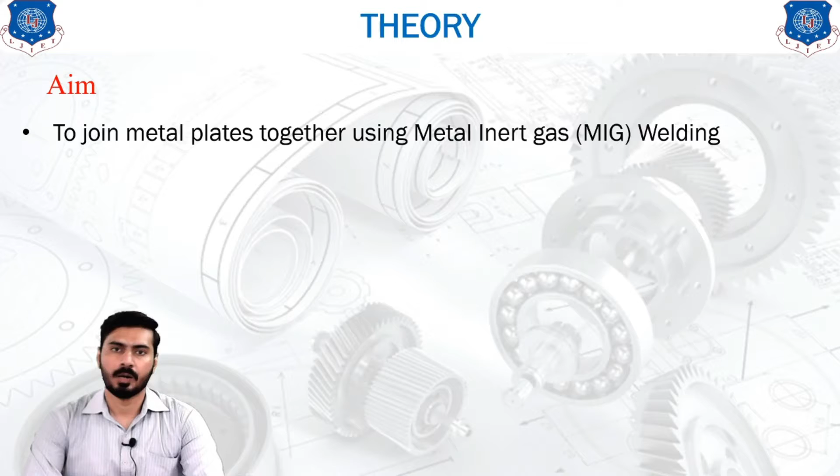Both are the same. You can perform each and every joint, but one more thing you need to understand before starting this type of practical is that MIG welding will help you create a longer joint lengthwise compared to any other type of welding. If you are welding using an arc welding setup or a gas welding setup, the length of the weld will be limited by the electrode or the filler material.

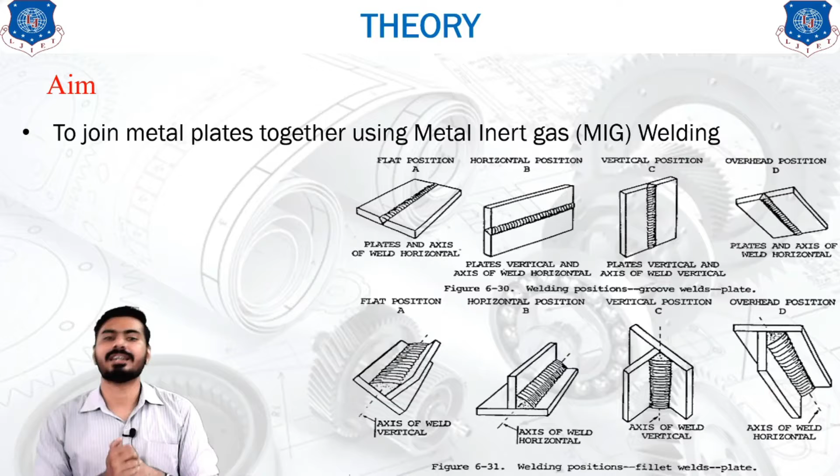But here in MIG welding, we are supplied with a continuous amount of electrode reeled up in a reel, or we can say a coil. That is why if you want to create a weld joint of a very large length, this type of welding will be useful for you.

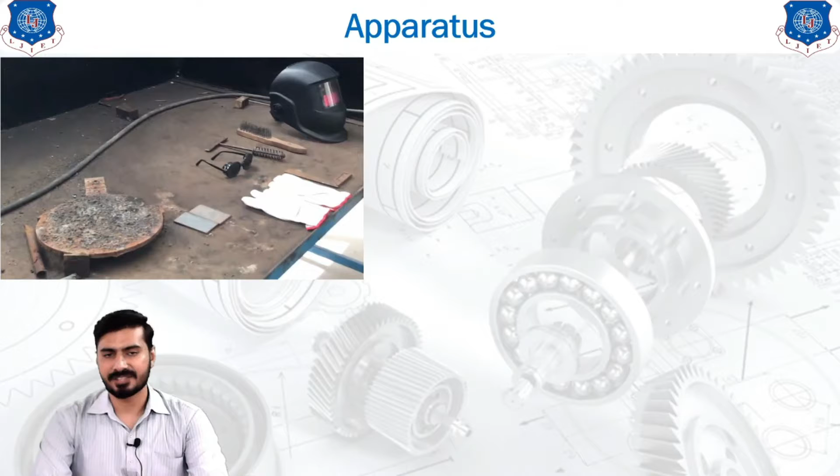How these practicals are performed will be explained through the apparatus used for this practical. As you can see, these are the basic apparatus, similar to the case of arc welding and gas welding, and if you have not seen that video, you can also watch it. Helmet, surface cleaner, negative earthing tool, gloves and eyeglasses are the same for each type of welding.

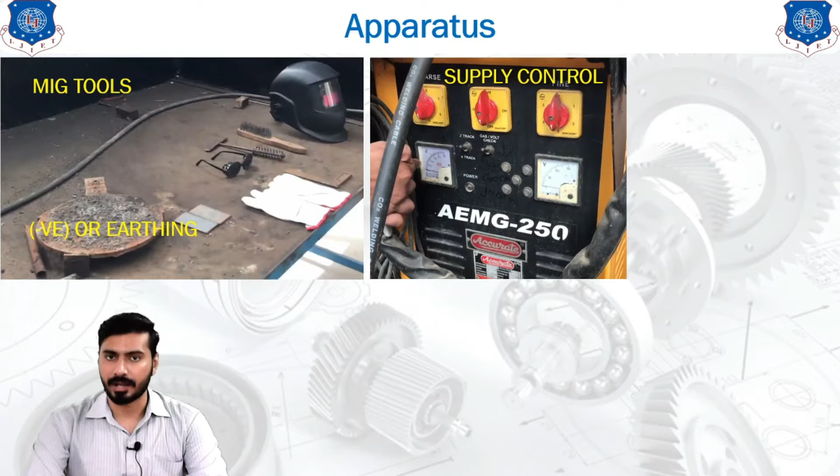Now we are looking at the control system or supply control of the MIG welding. This is the separate MIG system, where you can find different settings or dial gauges of the ammeter or current meter and the voltmeter, as well as different knobs to control the welding operation.

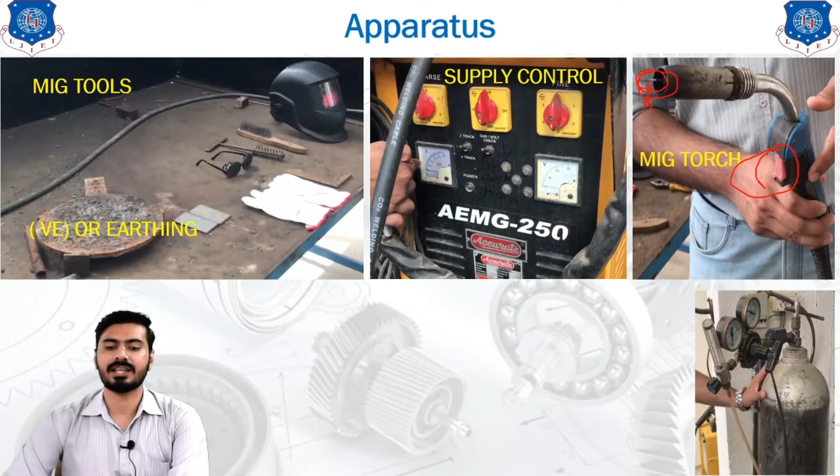So basically this is a torch containing the electrode in the middle, and in the surrounding it will be supplied with the inert gas, which is basically CO2 gas, supplied in this torch to perform the welding. Another thing you need to understand is this inert gas cylinder. This is basically MIG gas.

MIG gas can be any inert gas, but in our setup we are using CO2 as the inert gas. You will see these gauges, which help you find the pressure of the gas inside the cylinder as well as in the hose pipe, and there is also a heater provided here, which will be explained in the next part of the video.

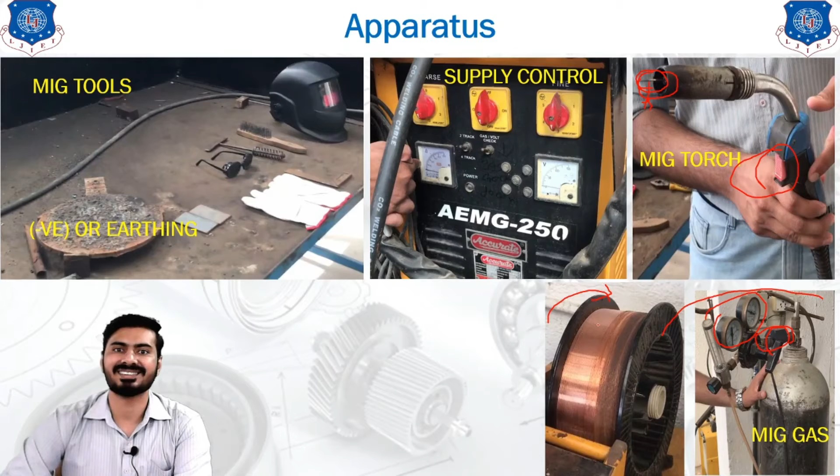Next is this electrode coil, where you can see the metal electrode reeled up in this component, which will be rotated to ensure the electrode is supplied continuously. As I said earlier, if you want to create a longer weld, this type of welding will supply a continuous amount of electrode, so the filler material will not run out, and that is why this type of welding is used for longer welds.

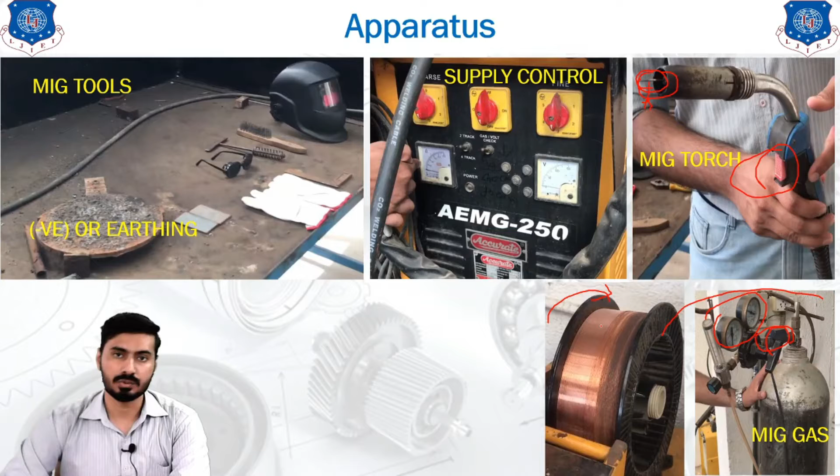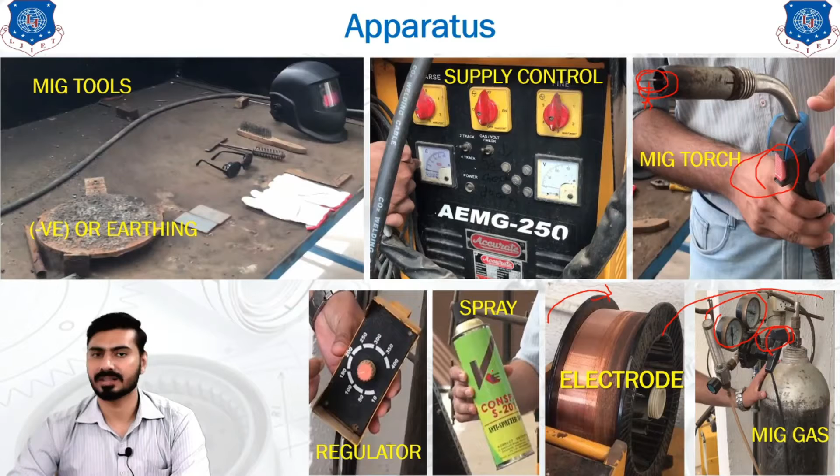This is the dial or the knob regulator, which you can see in this particular figure, which is used to regulate the speed of the electrode coming out. So basically these were the apparatus used for MIG welding, and now we are going to understand the working of MIG welding through this schematic diagram, which is the theoretical portion you need to understand before starting the practical.

So basically you can see over here that this is our weld, or this is our workpiece which is required to be welded with another one, and this is our electrode. This vertical portion, as you can see, is our electrode, and electricity is supplied through this electrode, which is a consumable electrode, and it will be melted in order to create the weld.

Now in order to ensure the continuous supply of the electrode, we have connected it with the wire feed rolls. Wire feed rolls will be continuously rotated after you press the button, and this rotation will ensure that there is a continuous supply of the electrode through this roller.

Next is this particular welding head. This particular welding head or torch of the MIG welding contains the gases, and these gases are supplied through this nozzle in order to create the shield around the weld, which prevents the oxidation of the weld, and eventually it will help you to increase or maintain the strength of the weld.

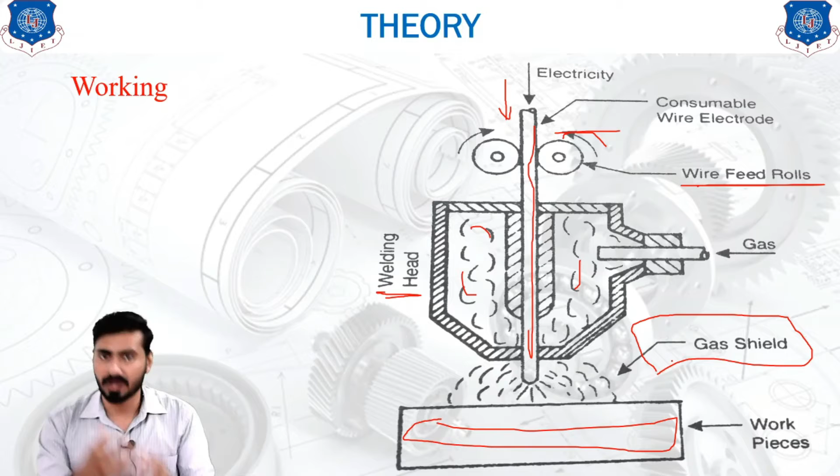So this is how the gas shield is provided, and basically this is also a type of shielded metal arc welding, but the only difference is that we are providing the electrode continuously through a wire feed mechanism, and that is why we will be able to create a longer weld as compared to any other types of welding. So we will be seeing the practical performance of this MIG welding in our setup in the next part.

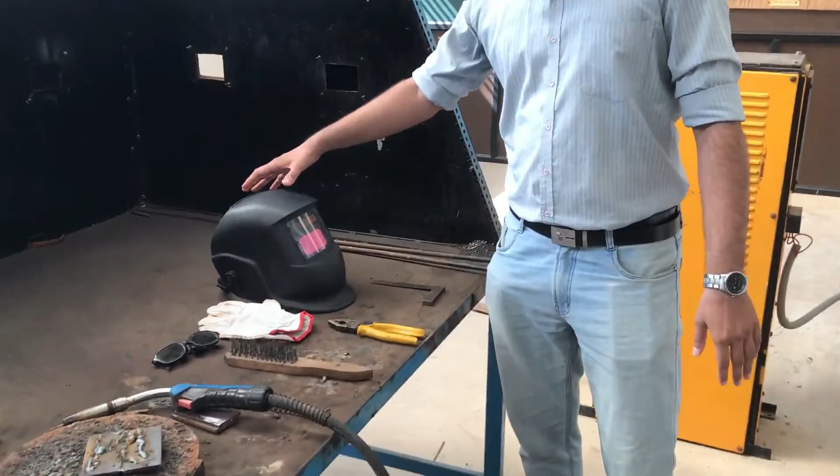Here we are with the setup of the MIG welding. MIG is an abbreviation for metal inert gas welding. So you can see the different instruments of the MIG welding. These are the basic instruments of welding. This is a digital helmet which will help you to see from the inside within limited light, and it will be helpful to identify the place where you will be applying the welding. These are the other instruments, like gloves, surface cleaner, eyeglasses.

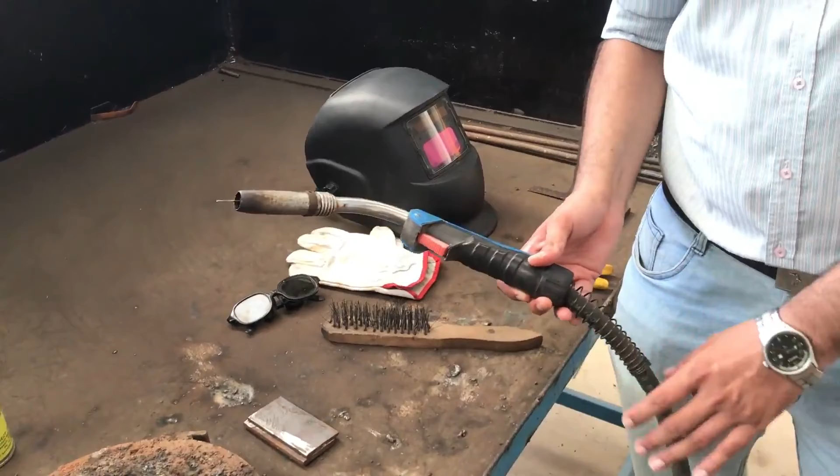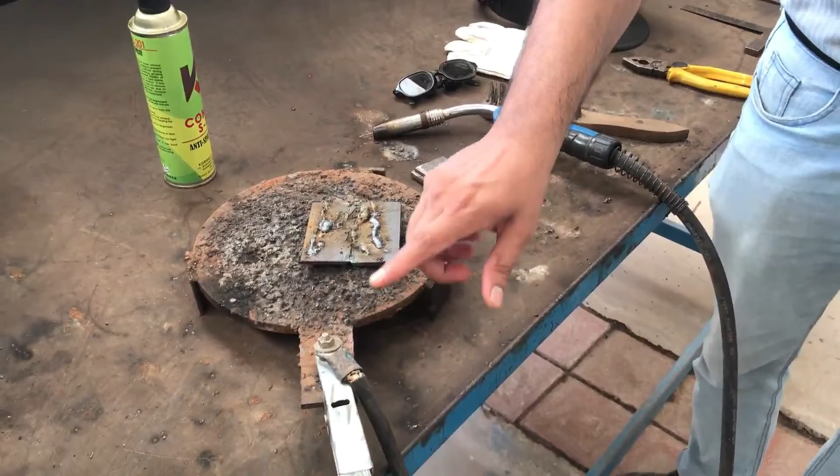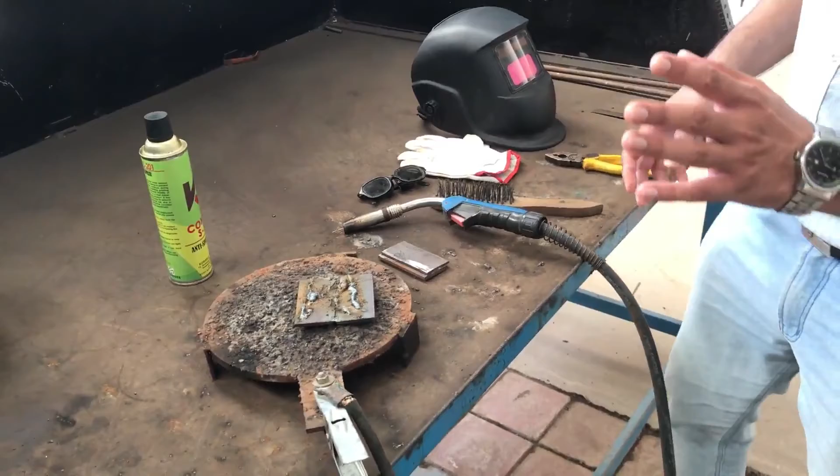Now this is our holder, and I will be explaining the different parts of this holder later on. First of all, we will see different parts. This is basically a positive terminal, and this is our negative terminal. The negative terminal is basically an earthing part which is connected with this metal plate, and when the positive and negative come in contact, our complete circuit closes, and based on that closed circuit, we will be able to generate the arc, and with the help of that arc, we will be able to create the weld.

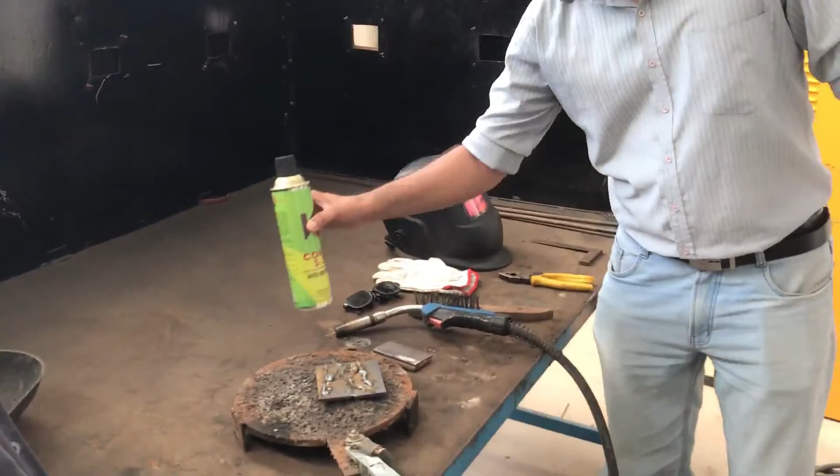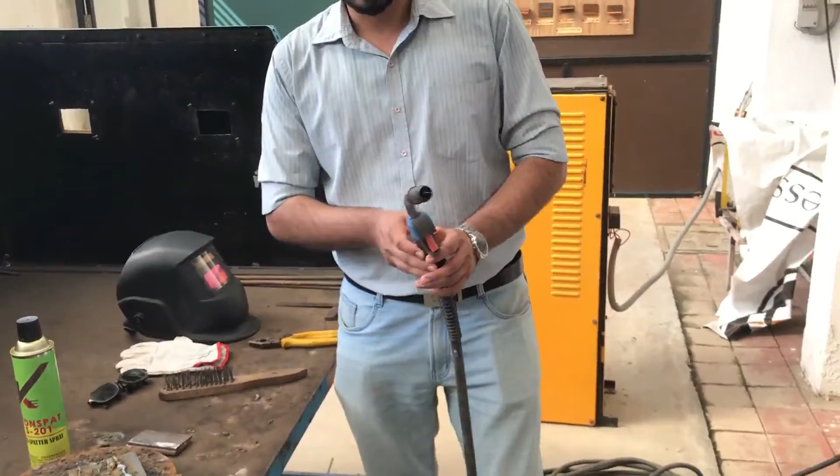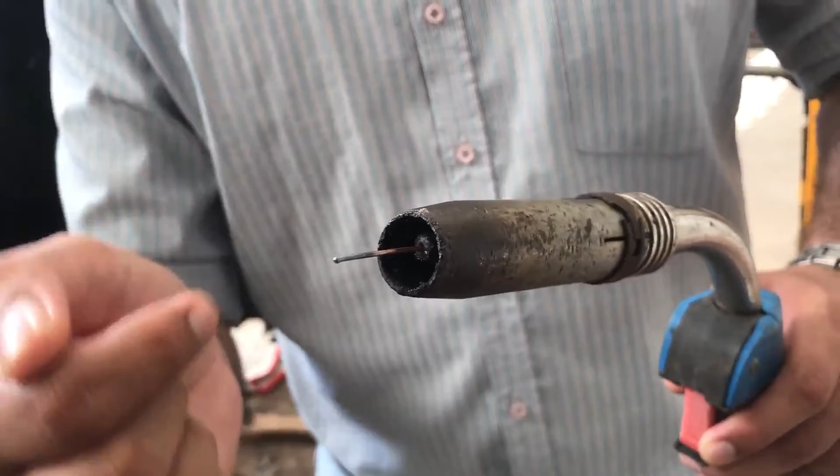Another thing is that here is a spray which is also known as an anti-spatter spray. Now what does this anti-spatter spray do? That will be explained with this particular torch. So this is our holder. As you can see, our holder has a torch like this, and in this torch there is a copper wire like this. Now this copper wire is connected with the supply in the MIG machinery, that we will see in a few minutes.

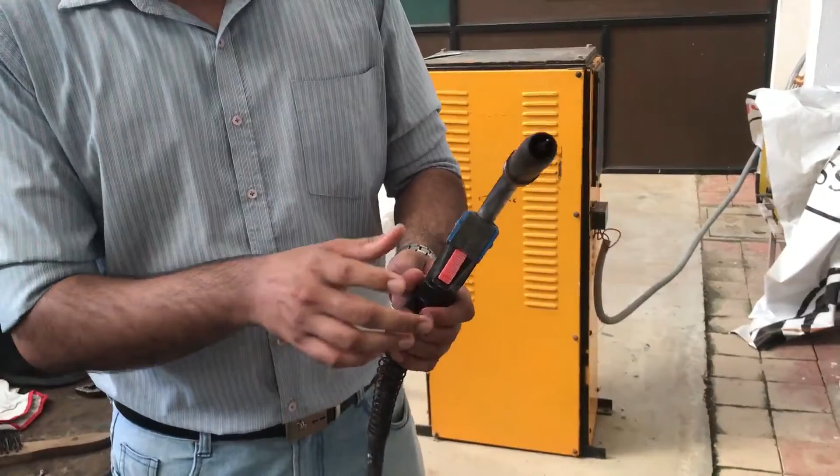But this copper wire is surrounded with the gas torch. Basically, this torch will spray out carbon dioxide gas, CO2 gas, which will work as a metal inert gas. Now, this torch will work only if you press this button. So, if you press this button, this copper wire will come out, and by melting this copper wire, you will be able to do the welding with this type of setup.

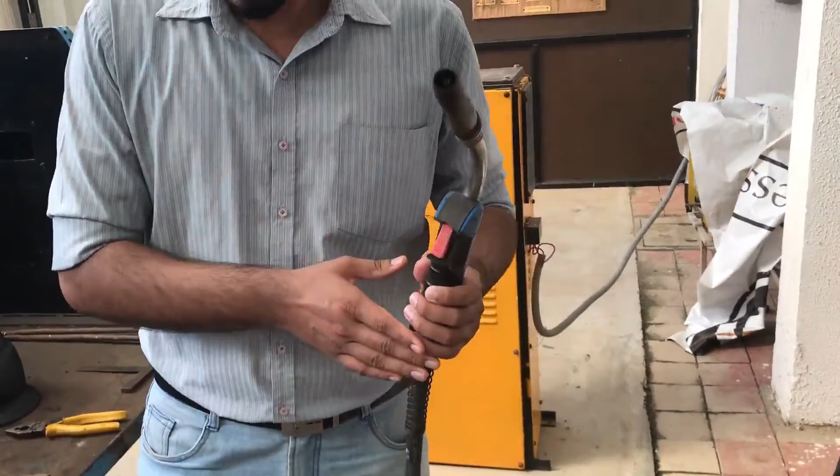Now, what happens sometimes while doing the welding is the arc gets jammed in this particular torch, and that is why, to avoid this jamming of the arc, you need this spray. Once you spray this spray in the torch initially before the welding, it will ensure that you avoid this type of jamming in the middle of the welding.

So this is the basic apparatus with which you will be able to do the welding. Okay, so this is our holder. Now these are our materials which we are going to weld together, and these two metal plates will be joined together in this particular welding. So these are the basic apparatus, and now we will see the setup in the MIG welding general setup.

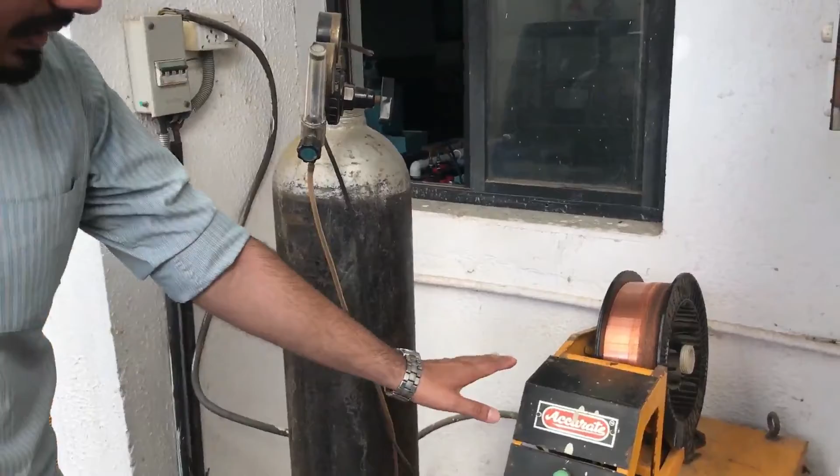So as you can see, this is our copper electrode. This copper electrode is a non-flux electrode. Here flux is not available, and that is similar to the theory that we have seen in the video. Now this electrode is continuously overlapped or reeled in this particular mechanism. That's why it will ensure that with the consumption of the electrode, it will supply continuously. So that is the main purpose of the MIG welding.

So if you want to generate a weld which is very long, and if you want to generate a continuous weld, then it will provide you the continuous supply of the electrode. But in the general SMAW that we have seen in the previous video, the length of the electrode is limited. So when that electrode is completely melted down, you will have to change the electrode and the weld will not be continuous. But with this type of welding, you will be able to generate a continuous weld with a continuous supply from the copper reel, like this.

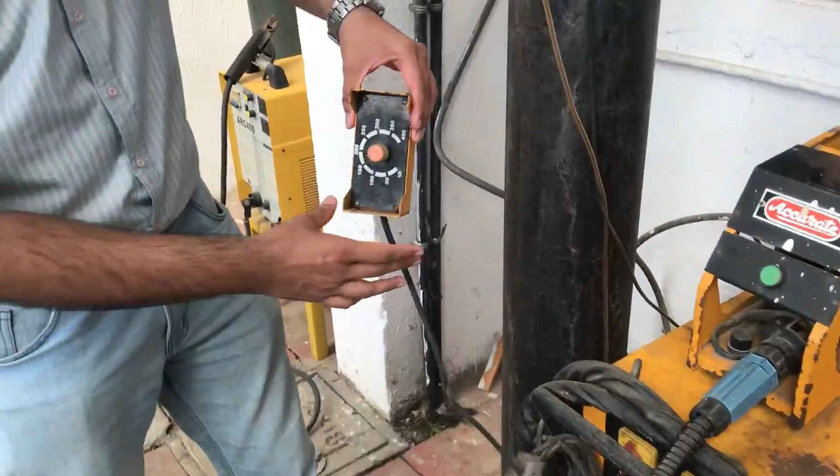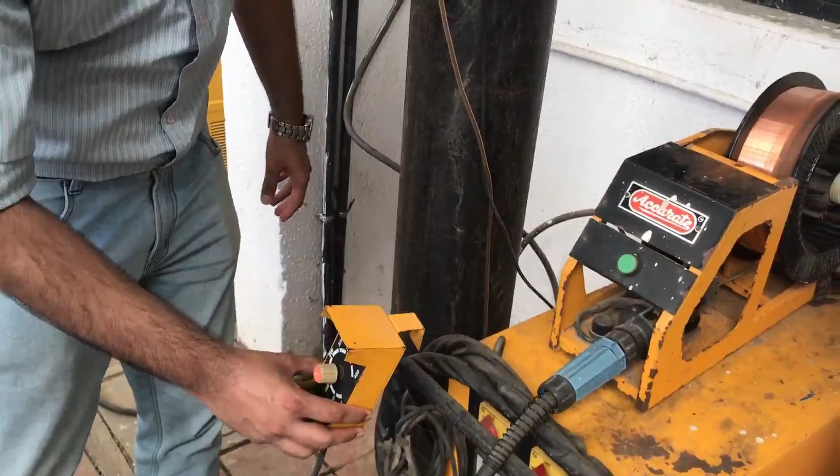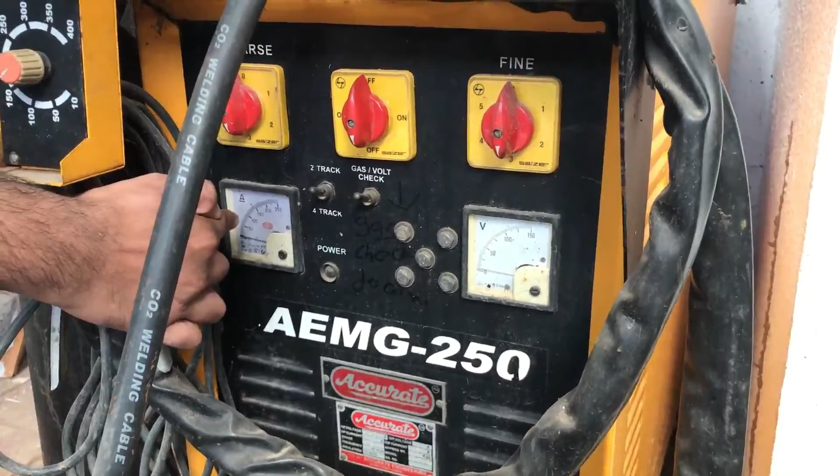Okay. Now the next thing that you need to understand from this setup is this one. This is basically a knob which will control the speed of the electrode which is passing from the holder that we have seen previously. So this will control the speed of the electrode. Now there are other setups available in this particular machine. As you can see, this indicates the ampere or the current intensity in the machinery. Here is the voltage meter.

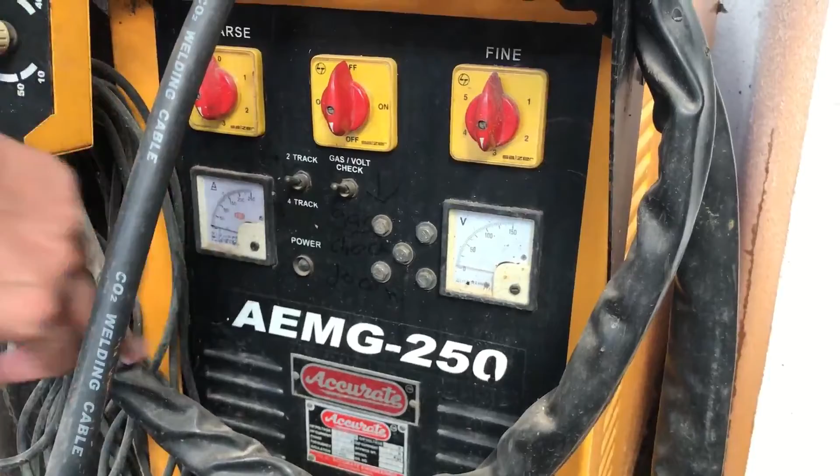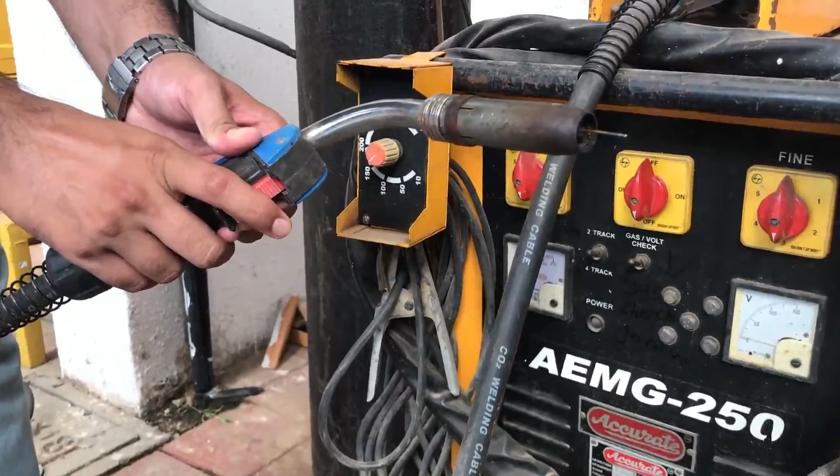Now you can also select, there are basically two options. The first one is the 2-track and the second one is the 4-track. Now what is the 2-track and the 4-track? If you keep your settings in the 2-track, which is available over here, then you will have to press down this button continuously. If you remove your finger from this button, then it will stop the motion of the electrode.

But what happens if you select the 4-track? Once you press this, even if you remove your finger from this button, it will continuously supply the electrode from this particular holder. So it depends on you whether you want a continuous supply without pressing the key, or you want to control the supply on your own. Based on that, you will be selecting one of these options.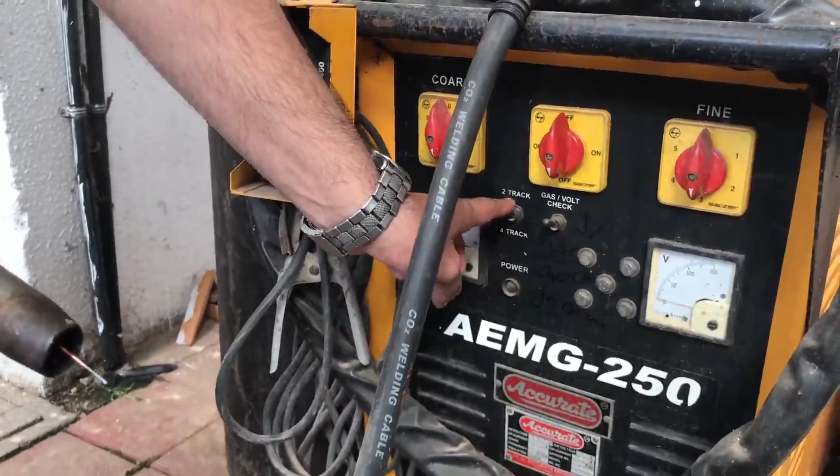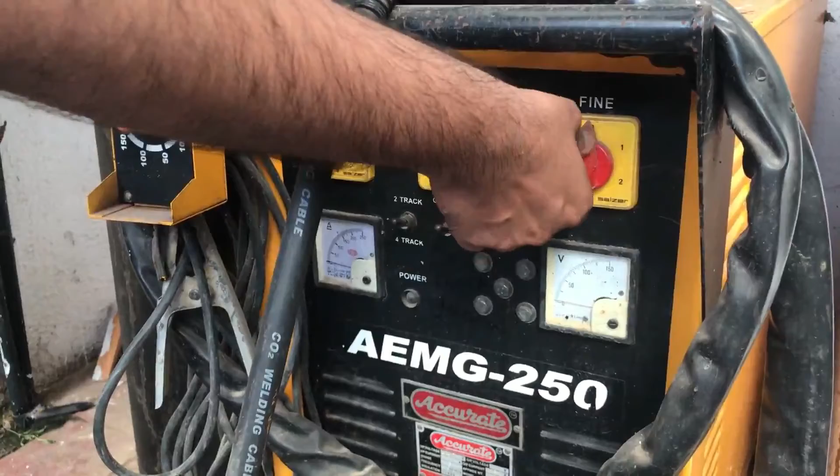Now the second thing is this gas check voltage meter. This will help you to check whether our gas pressure is sufficient or not. So before starting the welding, you need to ensure our gas pressure, and that can be checked from this particular knob. This is our fine knob from which you will be able to ensure that there is no extra amount of arc. If there is abnormal arcing, then you can adjust it by reducing or increasing from this particular knob. Now this is another knob which is required for the coarse, and we will be seeing these particular settings in our working condition.

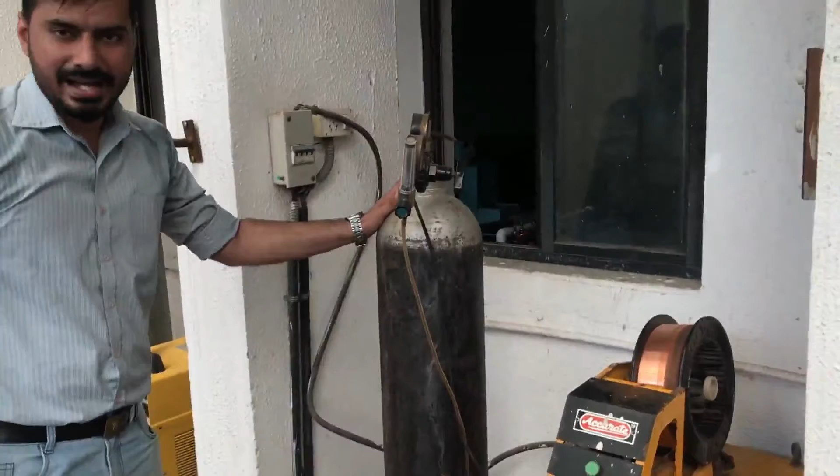Now we will see the gas settings that we have mentioned over here. Before starting the practical, you need to make sure whether the gas pressure is sufficient or not. So for that you need to start the knob for the gas checking. After checking, you need to open the key of the gas that will supply the gas from these particular settings. Before supplying the gas into the machine, we need to compulsorily heat the gas. So basically this is a heater for the gas. This heater works on electricity. That's why the gas will be heated in this particular mechanism.

Then the gas will be supplied to these particular gauges. In these gauges you will be able to see the pressure of the gas, and you will also see this ball moving upward and downward according to the pressure of the gas. Now this gas will be continuously supplied into the machine, and through the holder you will see the gas in this particular torch. So gas will be supplied over here, which will create a shield for the welding. This shield will help you to avoid oxidation or reaction from the atmosphere on the welding. So this is the basic apparatus of the MIG welding, which is also known as metal inert gas welding. Now we will see our working in this particular mechanism.